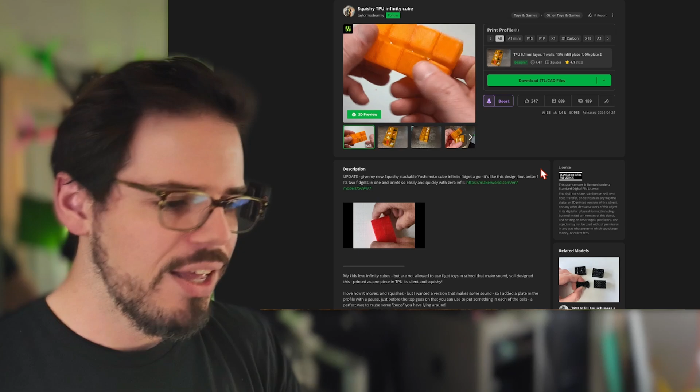We're going to design a squishy TPU infinity cube. It's going to have living hinges, and it's based on this design right here, made by Taylor Made Army on Maker World. So thank you for that inspiration.

So it's pretty cool, it uses living hinges. Instead of having to create hinges that move, like two parts that connect and interlock together, it's just one piece that bends. You can do that with TPU because it's a flexible material. I'm sure I have an idea in my head, but we're gonna figure it out as we go.

And you're probably familiar with infinity cubes. It's 8 cubes connected together in a certain way so that you can fold them and fold them and fold them to infinity and beyond.

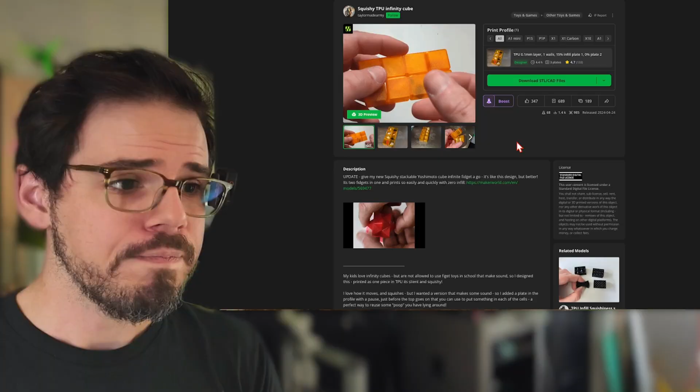Anyway, let's get started. All right, now we're in Bambu Studio, and I have this model from Taylor Made Army of this squishy TPU infinity cube. The main thing I want to use this for is to keep track of how this is built.

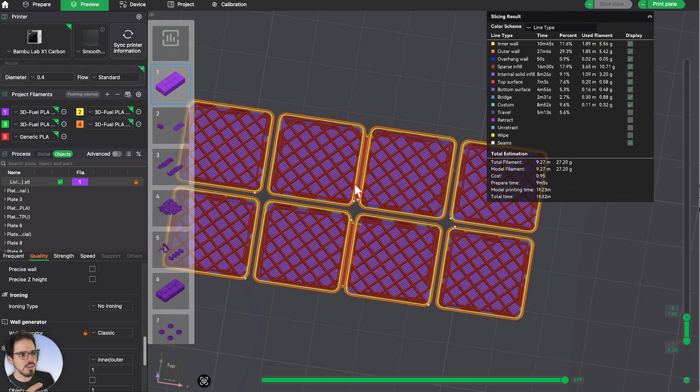You'll notice we have a hinge, and this could be done in different ways, but the main thing is you need to have a pair of blocks hinged in the same way.

In this case, we have the hinge here on the bottom, on these bottom blocks, and that's the first thing that prints. Then once the walls start coming up, we have pairs on either side, or from this view, the left and the right, with the hinge on that side. So hinge there, and then spin it around. Same on the other side. So symmetrical in that way.

And that's probably one of the best ways to print this. We could figure that out later, but that's just the thing to keep in mind. So this should be theoretically super simple.

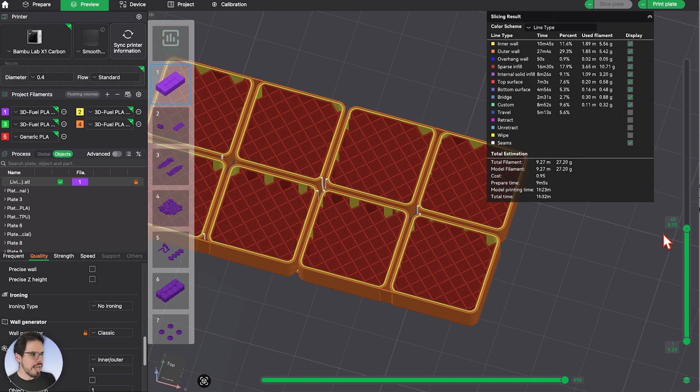One thing that I noticed with this one is the edges. I just wanted something that had chamfered edges. I thought that would be better. And then the living hinge, we'll figure that out. And maybe a little bit thicker.

I just broke mine, like just as I was beginning to start this video. I broke the hinge on it, but I've been rough on it. So it just broke apart. Now it falls all apart. So possibly a thicker hinge.

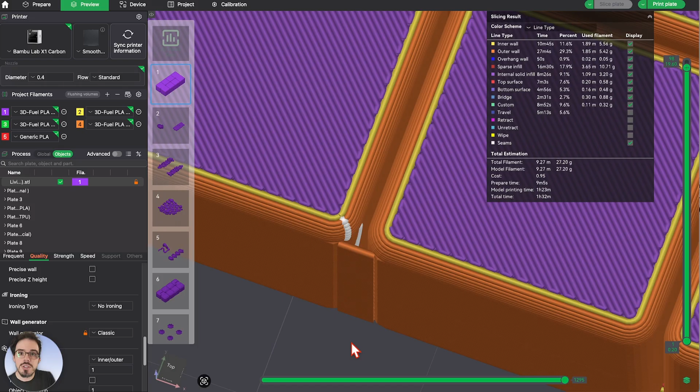But now that I'm looking at this, I think what I did wrong - I'll bet I did not do arachne. I should have followed the instructions and it didn't actually connect very well. The top view, you can really see it. Let's switch to arachne just to show you this. And boom, look at that.

It connects them. All right, now we're in Onshape. This is where we're going to design this. I have an idea of how to do this in my mind. I have not written anything down yet. So we'll see how this goes.

So what I'm thinking is we do a sketch, put it on the top plane, view normal to sketch plane. Then we get a center point rectangle, and we decide the size we want this to be. The original size is, let me just get my calipers here. We're looking at about a 20 millimeter cube, is what it was supposed to be. It's looking about 19 or something, so probably about 20 millimeters.

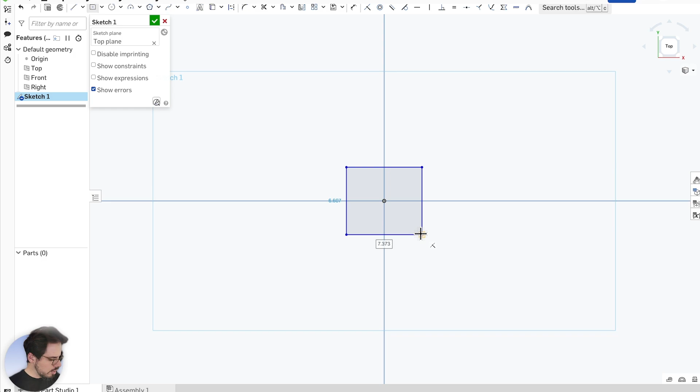I think that's probably a little bit big. Let's try - I've got the calipers here. I mean, probably 15 would be reasonable.

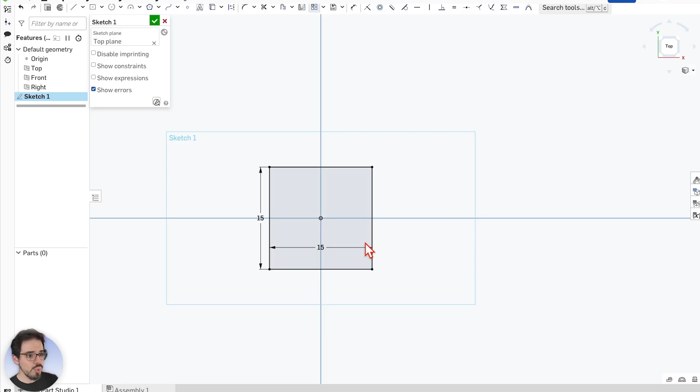Then what we're going to do is go up to the linear pattern tool, and we're going to select - yeah, there we go, select that for our linear pattern. We're going to do 4 in that direction, and 2 in that direction. And then we get to decide the spacing, basically. So the spacing, what should the spacing be? That's a good question.

Oh, I thought I did 4. There we go, I forgot to press enter. So...

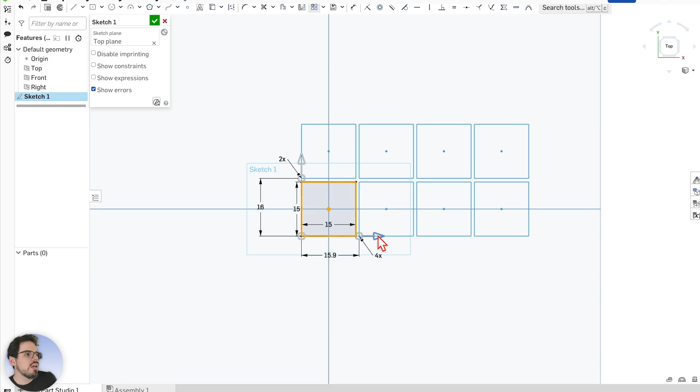The spacing should be even. I don't know, actually, let's make it 1 millimeter. That should be plenty, let's give it a try. So what that means is the offset, or whatever it's called here, is going to be 16 for both of them. Yeah, both of them, so 16, 16.

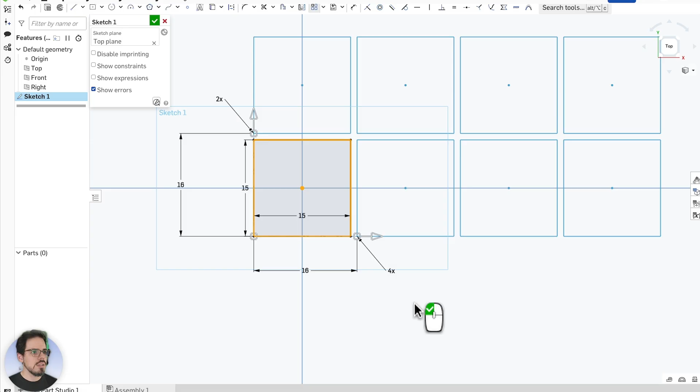So we have this nice, super simple grid. There we go. And then what we're going to do is connect them. But first, let's just take a look at, let's use the extrude function and just extrude all of these cubes. And they should be cubes, so we want them to be extruded by 15 millimeters.

Okay, nice, right? And then we basically just need to put walls on the connecting hinges. So I'm gonna try to not overcomplicate things. You know how I go sometimes. But we're gonna do it like this.

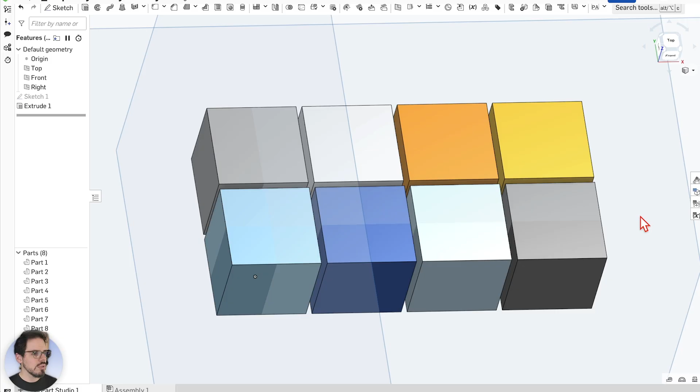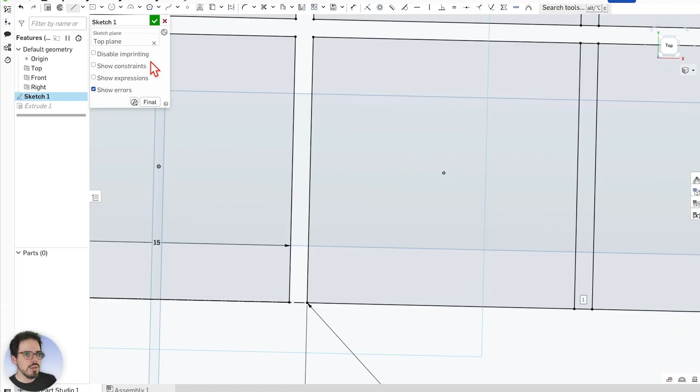So we have all these cubes, and then let me go back into the same sketch. Here we go. We're gonna just add lines connecting this gap on the two middle cubes, and then we'll go ahead and use a corner rectangle. These two, here and here, the two outer ones are going to be folding together.

I'm gonna make this like 0.6. The thickness of the hinge is really what we're talking about. Okie dokie, so we have these connected, those connected. Great.

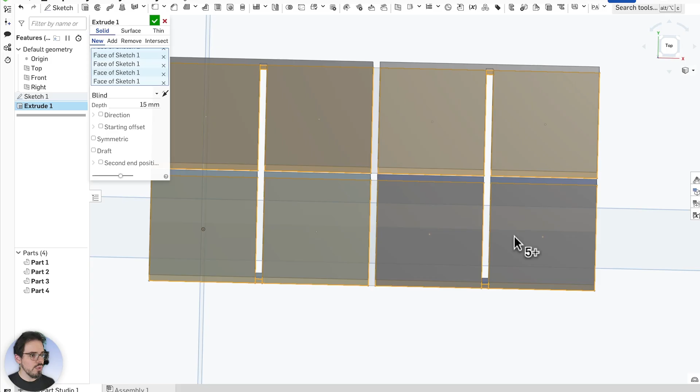Okay, and then actually, as far as the extrusions go, we can extrude the hinges on the sides at the same time with the blocks, at least for how we have it right now. So those blocks are hinged together, and then we need to do a new extrusion because we will not be going up the full length of the block.

So extrude, and then we're going to do our middle sections. Let's get that, come on, bring that sketch back. There we go. Our middle sections, both of them. There we go. And we're going to extrude, the height is going to be 0.6 millimeters.

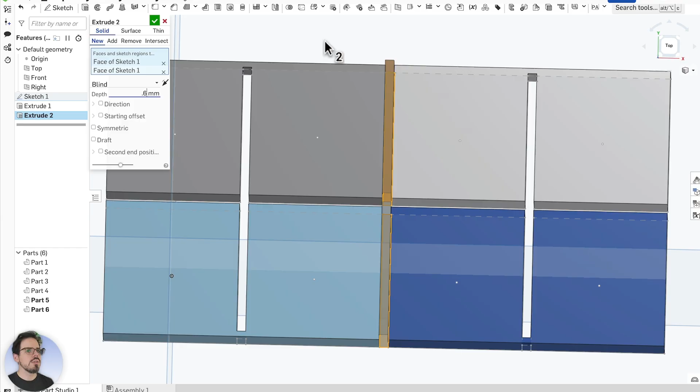Which that should work out. We'll try it, because I don't know, it kind of depends on the height. That's pretty darn thick, but that should be, I don't know, that looks really thick for how big the hinge is. Why do I feel like the thickness of that should be like half of what the gap is?

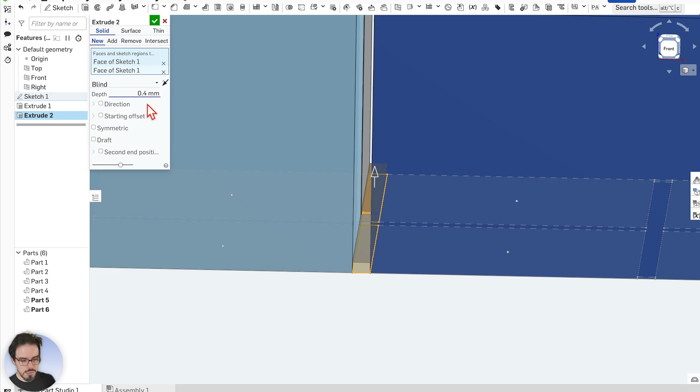I don't know, but basically the thicker this hinge is, the less easily it will move, and that could be a problem. So, just to test things out, why don't we make that one like 0.4, let's say. So that should be 1, or if we do 0.2 layer height, it'll be 2 lines, which is probably the same as the bottom thickness.

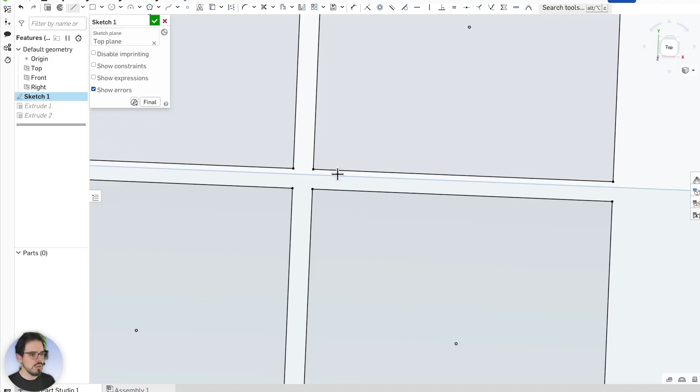We want to merge, just say merge with all. So we're going to merge those two together. Sketch 1, we only have one sketch. Do that to there, that to there. Connect those two like so.

Okay, and then when we extrude, we'll do a third extrude. We're going to extrude that and that. At this point, though, we have to extrude up to this face. Second end position.

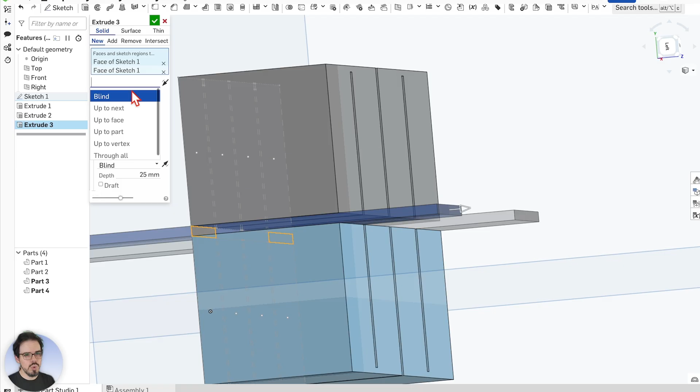Let's see, the first one is going to be up to face. Second one is going to be 0.6 millimeters from the opposite direction. 14.4. Let's click add. Oh, I did click both of those, so that's good.

Let's just say merge with all, because then it's just touching those ones. So that's the...

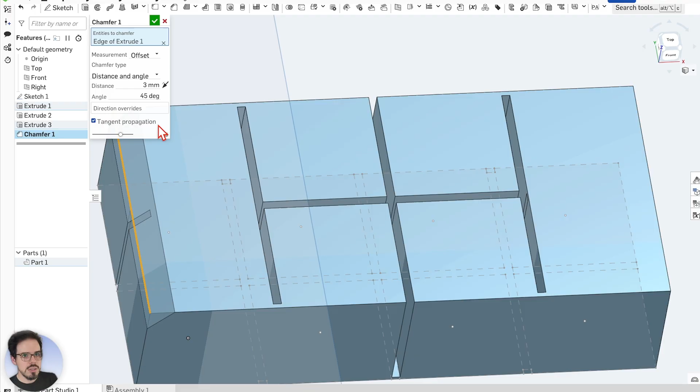Idea anyway. Let's go ahead and play with the chamfering. So with the chamfering, we're going to get the chamfering tool, and then we would pick a section. Let's say we want it to be like maybe 2 millimeters, something like that. So that's kind of the idea, is that we would do it on all the corners.

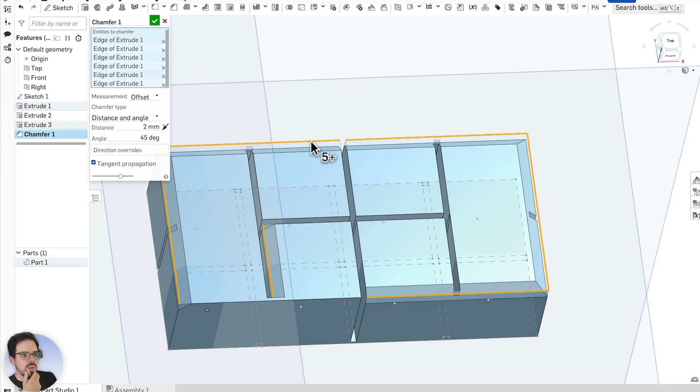Interesting, okay, so the chamfering is not working out for a lot of these for some reason. Then I think it's because of the cutouts, the way the cutouts are. Interesting, okay, so potentially it would just be chamfered on that outside.

So let's go ahead and just export this guy. Let's drop that guy in there. Wow, it's so much smaller. Holy smokes.

So let's slice the plate and just see what we've got. Looks pretty similar, all right.

Okay, all right, let's get away from classic. Let's go to Arachne. And there we go.

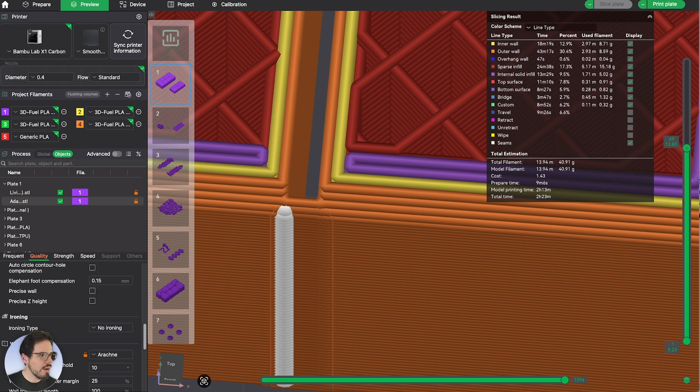There we have our walls, but as you can see, they're pretty small. And there's a seam right there. I don't want a seam right there. That is not a good spot for a seam at all. So let's just see if we can change where that seam is going to be.

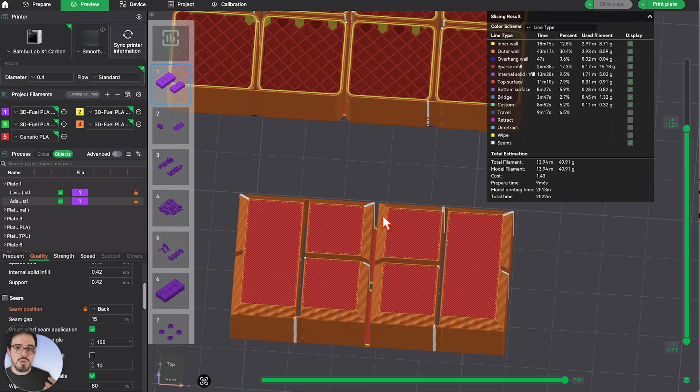If we set it to be at the back. Before I do any more designing, we're just going to load up the Bambu Lab A1 printer with some TPU filament and just give this baby a whirl.

Move that one off the build plate. We're just working with this guy right here.

The main goal for this is for it to be silent and not have that clacky clack sound of the PLA. But making it squishy could be pretty cool too, and that could be kind of a neat little feature there.

Now let's get it printing.

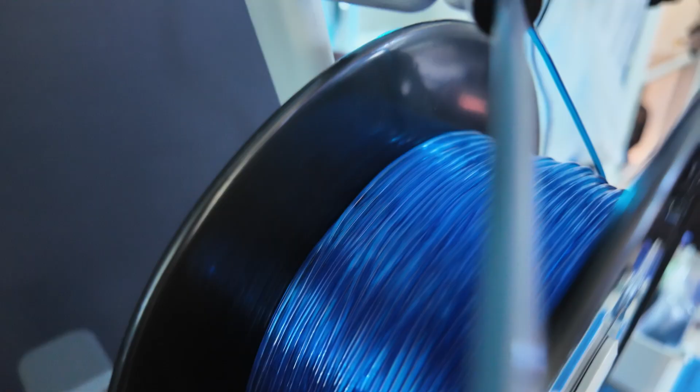All right, here it is. It printed out. Let's pull this out of here. I'll have to squeeze this off here.

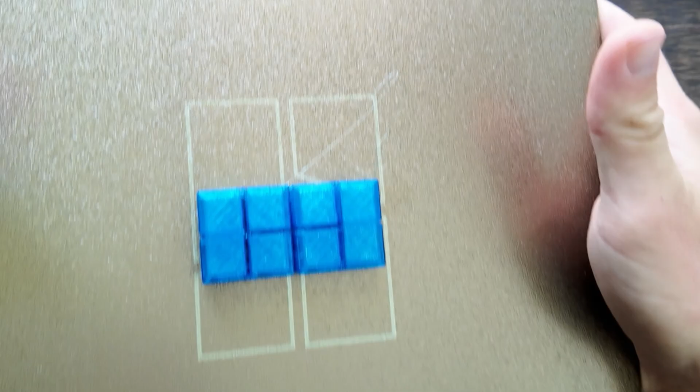Of course, we can't really pop it off the build plate, we're gonna have to kind of pry it off. I know you're not really supposed to use the textured build plate for this, but I've used it before with TPU and it's worked out okay, but this is very, very sticky.

Fortunately, it's a little bit of a smaller model, so we don't have as much surface area, but... All right, let's see what we have here. So, does it fold? Yeah, it does actually.

And, you know, there's a little bit of a gap right there, so it's not a perfect even amount, but that works. It folds this way.

And it should fold on the sides, so two sides fold in. Fold in here. That's going to be the sides. Right, so fold the top and then the side pieces, which are extra thick, really.

So there's a lot of resistance here, it wants to spring out, which some of that will go away as it gets worn in. And then very little resistance in this stage.

Fold it again, and then it wants to fold back in on itself, which is kind of cool.

This, by the way, is a clear blue SainSmart TPU. I think it's also 95A. It's very squishy, it's nice and squishy.

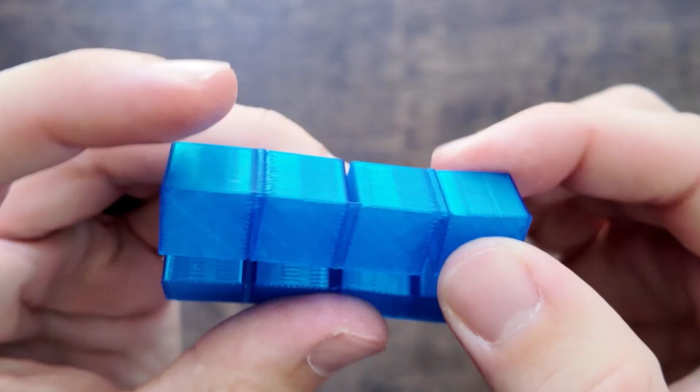Another option would be potentially doing like how I was saying, and adding a little curve to the hinge. However, is that very realistic? Probably not.

You know what would be really cool? Maybe it would be really cool is if you had magnets in here.

Now that we have a good reference point with this first printed version, we can go back into the editing program, change a few little things that we just talked about, and then print another one and see how it goes. Probably increase the size a little bit as well, I think that would be probably good.

Let's do it! So now we're back in Onshape. We're going to make some design changes to our first version here.

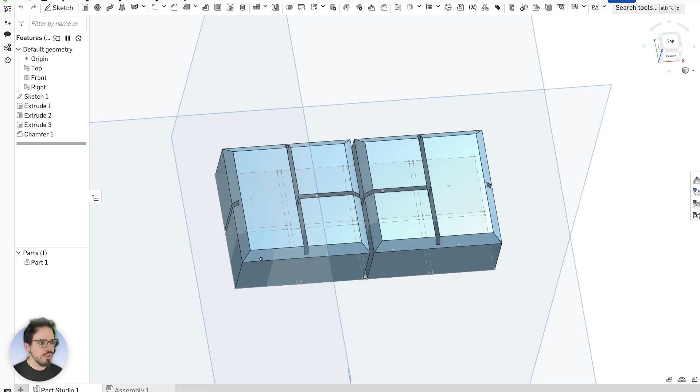What does that look like? 17 millimeters, and then 17.5.

17.5 is the spacing, so that we have 0.5 between them. So there we go, a little bit bigger. So we have the sizing.

What I want to do here is try on this original sketch putting in a fillet. We want to do a fillet here because it's going to give us a nice rounded edge, since we're going to be taking it up vertically. Generally on the vertical pieces you can do a fillet, while on the horizontal pieces you want to do a chamfer.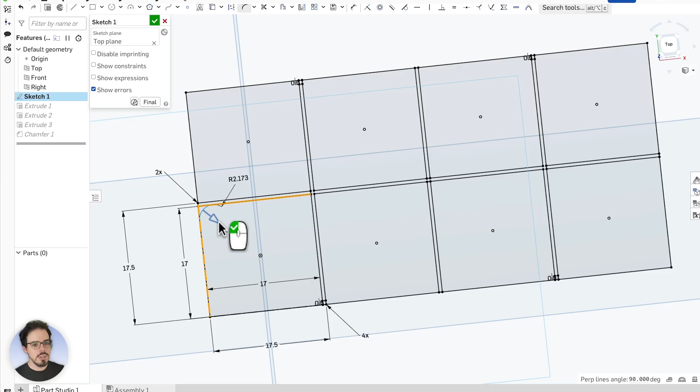Let's do 2 millimeters. Okay, this one and that one. Enter, enter. Great, so that's what that looks like. Looks like a nice cube.

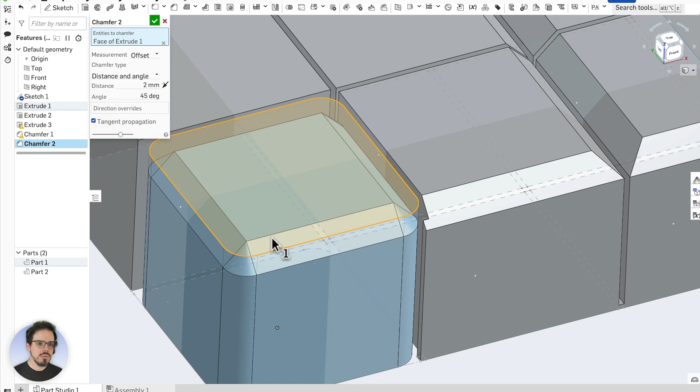Now the question is, can we add a chamfer to the top of it? And how do we do that? Oh, yeah, and I think that's a pretty nice chamfer, so it should be nice and smooth. It is. Also, we want to chamfer the bottom, just like that. We also want to chamfer here because then we have this 45-degree angle, and we'll be able to stack the layers up just fine, especially considering we're working with TPU.

We basically are. Delete sketch entity. Yeah, and then it's basically just making all of that like that, so we're basically starting from scratch.

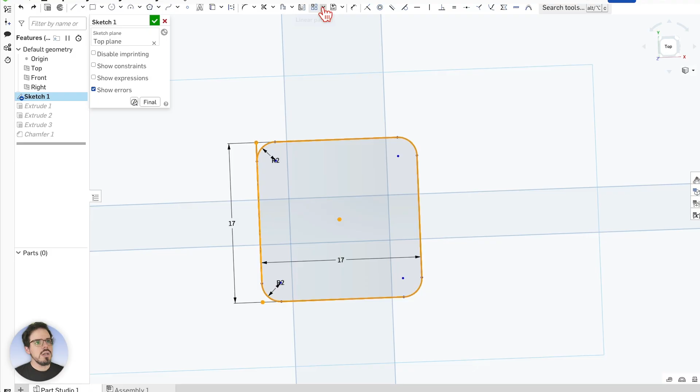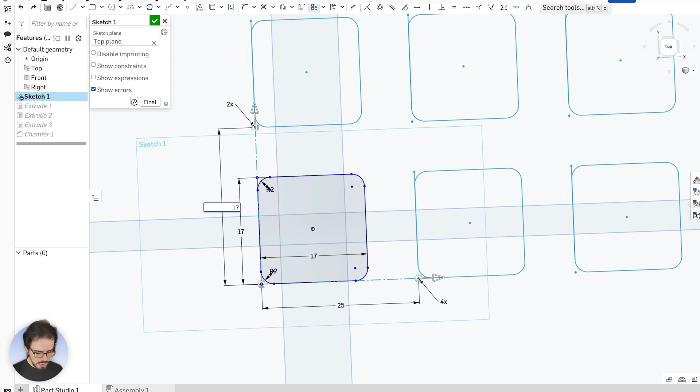Now we can take this and take the shape, and in some ways this is extra work, but the idea is we are doing this once, making the shape once, and then we can just copy whatever we need to. So this is going to be 4 in that direction, 2 in that direction. The distance is going to be 17.5 millimeters and 17.5 millimeters.

And now we are back to our nice rounded cubes. So what I want to do is get a center point rectangle, and I want to find the center of this line, and then the center between that. Do a corner rectangle using one of these radius points and just do it like that.

Let's do a line, midpoint line. What if we took it all the way from here and all the way from here? So 0.4. There we go. That's what we want, okay.

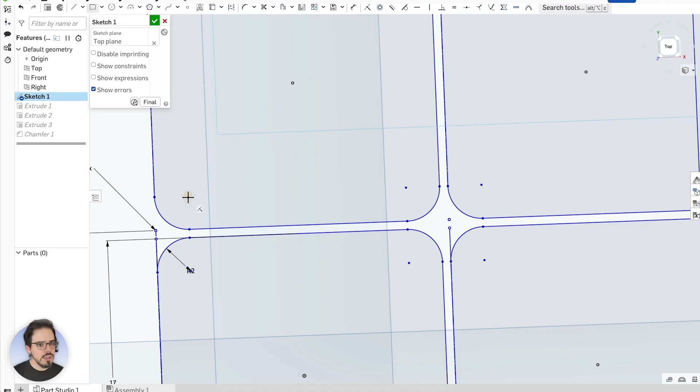We're going to do the same deal of attaching these two as well. So from that point to that point, and that point to that point. Extrusion. Extrude, so we want to extrude.

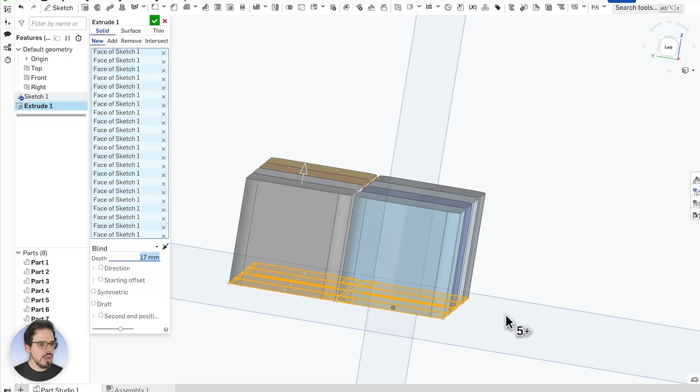So I guess this is the downside - I should have maybe done a different sketch for the other bits there, because then I'm going to have to click on a bunch of stuff. All right, at this point it looks like we have our nice cubes here with the rounded sides. We're going to click OK.

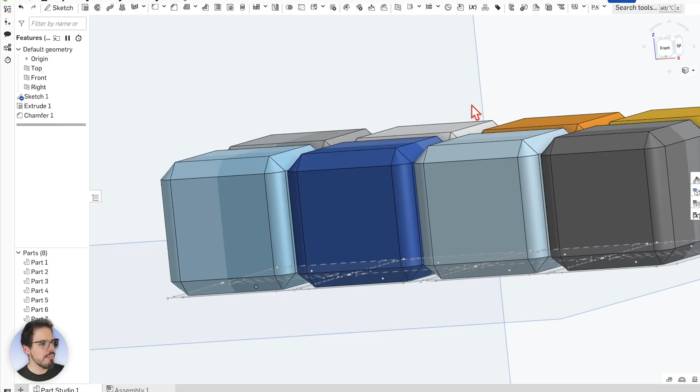Next we want to do the chamfering. You get a chamfer, you get a chamfer, you get a chamfer, you all get a chamfer. Look under your seats - what is it? It's a chamfer. Let's click OK. And that looks pretty smoking right there. Look at that thing. Wow, wow, wow, wow, wow.

So what are we going to do next? We changed the sizes, we changed the blah blah blah. Basically, well, we just need to connect the extrusion parts. I should have clicked on that in the first place, but that's okay.

0.4 millimeters. Okay, we want to merge. We want to add them with parts 3, 4, 5, 6. Great, so that looks really nice. So there you go. All right, cool.

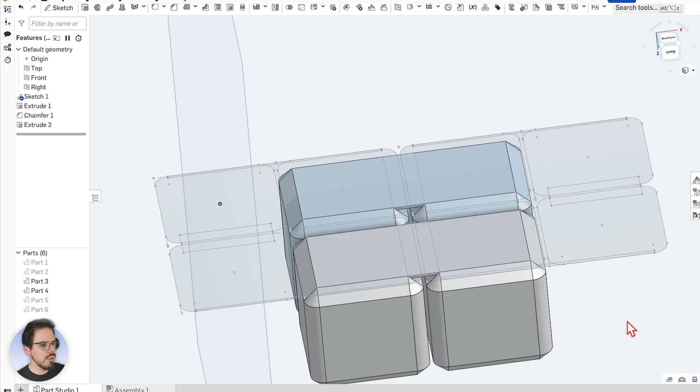So that should be nice and smooth, should print well. And then we're going to extrude, let's go ahead and extrude the walls now. So left side, second endpoint.

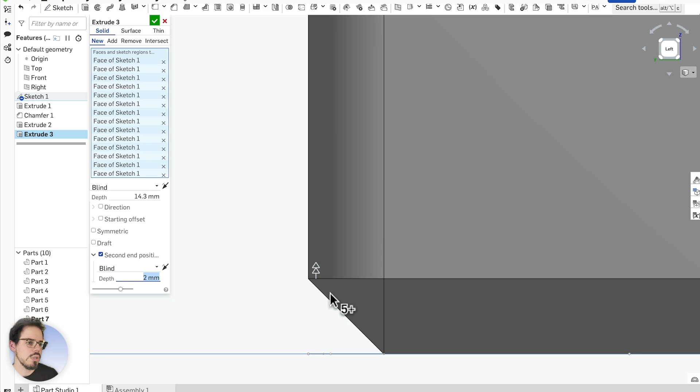I'm not totally sure how that's over there. So basically, if we say we want it to be like right there, which is 2 millimeters, by the way, that is the same as the chamfer that we put on there. Add - we want add, so merge scope, merge with all.

There we go, we have this nice face. It's going to connect right there. That should be just super great. 0.5 millimeter between here - I think that's reasonable, especially for the printing tolerances. We're going to want a little bit of tolerance, but we can change that if we want.

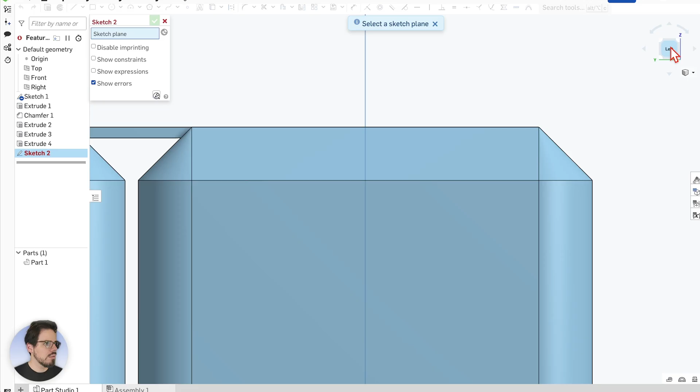Hear me out, hear me out - maybe we take 2 corners and do like a little ball divot. Because, you know, I can't just leave well enough alone. That would be crazy. Absolutely amazing. So let's do a sketch on this plane, on the left plane.

Or the right plane, I guess it's whichever one. We're going to do a line, take it from this midpoint. We'll use this and this, and take a line to find this center point and just bring it on down to here. That'll be our reference point.

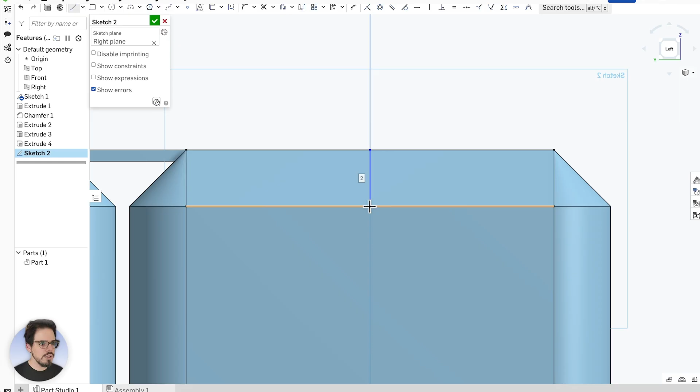We're going to do a 3-point arc. We'll take it from... I don't want to go quite to there, but let's just say if we took it from there and did it like... is it going to be...

Alright, scratch that, we'll just get a midpoint line. That way we know it's symmetrical. And let's just take it out to, I would guess, about... oh, that's right, 12. That's what we wanted to do, right? We wanted to take it out to 12.

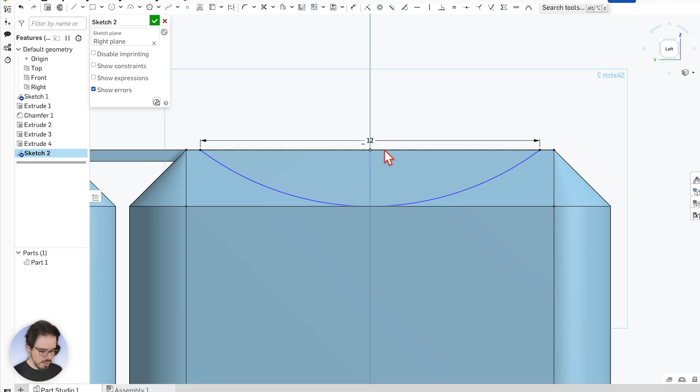Okay cool, the difference here is that we are on the side of the object, so we're looking at a side view. Let's change that to Q so it's actually a thing. And then we have this half chunk right here. Let me delete that and put in another line from here to here. Oh, we need to make that an actual line, so then we actually have a chunk. We will once we get rid of this.

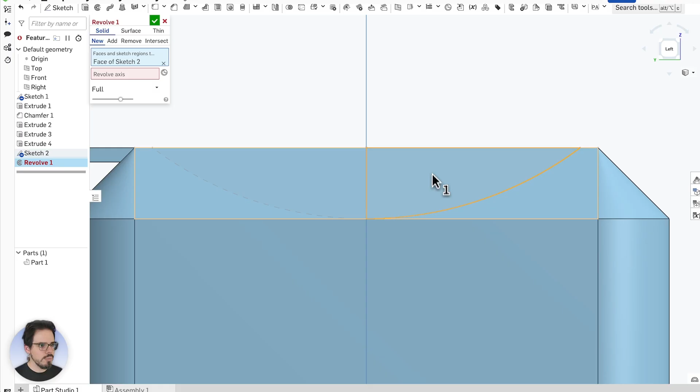Okay cool, now what we can do is click OK, and then we can revolve. We're going to revolve half of this to basically form this bowl. The axis is going to be, we'll select axis, that's the axis, and then we're going to say remove. And that's what we're going to end up with.

So let's go to sketch 2. Let's go to the left side, and then let's use this line and this line and this line, pretty much all the lines really just about. And what we're going to do is get a line and find the midpoint of this line from here to there. There you are. And just take that right across.

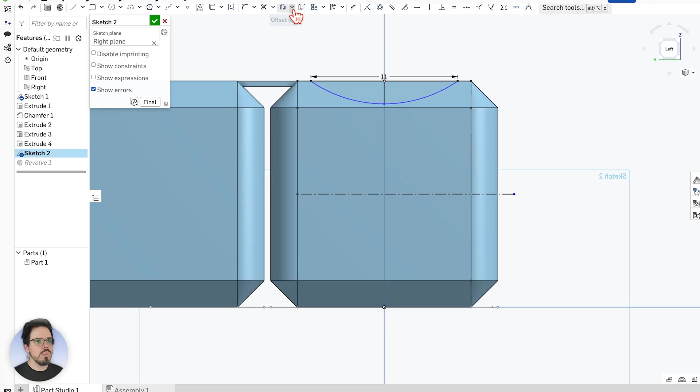We really don't even need to connect it to anything, it's actually just going to be a reference line because we're going to mirror this, I think probably the best way to do it. So we're going to say mirror, select the line. You always got to select the line first, which I think is the opposite of Fusion 360.

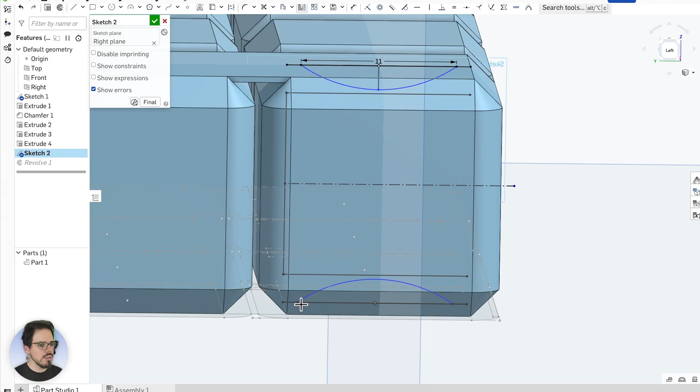And then that's the line we want. Is it? Yeah, sure it is. Those should be connected, those dots should be connected. And let's do that too. Great, and so we're like, okay cool.

And then we go to revolve, and we're going to revolve this sketch as well. So we need to hide this, hide that, we're going to revolve that and merge with all. Let's show that part so we can see it.

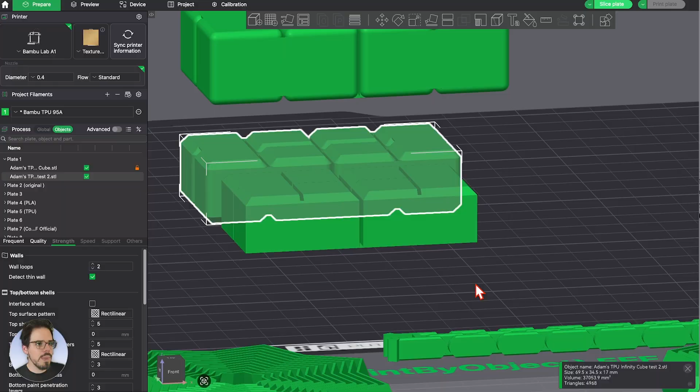Boom, Bambu Studio. Now we're in Bambu Studio, and we're going to take the test 2 version that I just did and put that in there. Okay, alright cool, you can see it's a little bit bigger, it looks much smoother. I think it's probably just about the perfect size. It's much smaller than the original, or the other person's version here that the other designer made. It's much smaller, but still bigger than what I had. So I think that's cool, I think that's going to be really great.

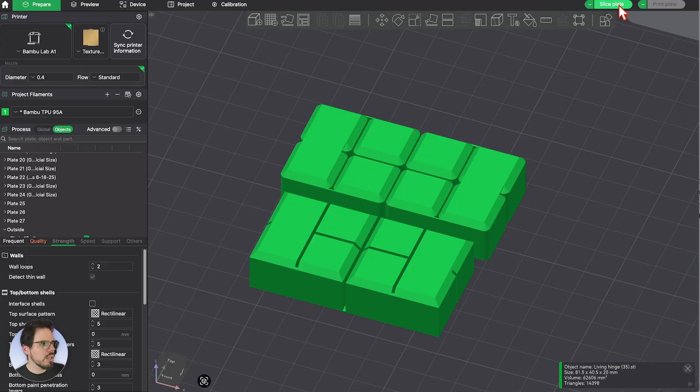Let's go ahead and slice it, and we'll slice both of them side by side just so we can see the differences here. Okay, alright, looking good. Yeah, well actually not looking good because we need to change the settings on the new one. Alright, I'm going to toss this on there and then we're going to print it and see how it is when it turns out. So let's start printing.

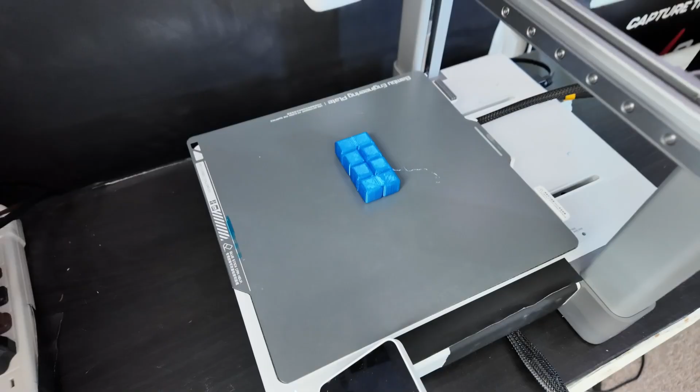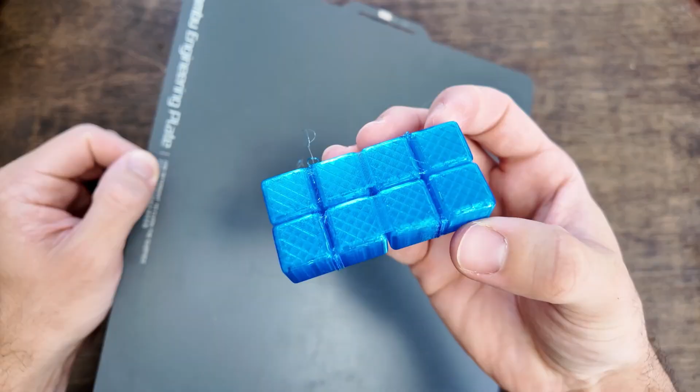Alrighty, here we go, it is printed. Let's pull up this build plate. Maybe this one will be a little easier to take off. Alright, version 2, let's see how she turned out. Let's see how much this sticks. Oh yeah, oh that's such an easier release. That's crazy. Alright, so this one didn't turn out as clean.

We have some stringing and whatnot. Oh wow, very thin, very floppy, I kind of like that potentially. And then very easy to turn right there because the hinge part is so much wider, so you see we actually have a lot more play, which could be bad, but let's see here. So we do that and then we fold. So folding these guys, you can see we have quite a lot of stringing.

Oh wait, so this is the bottom, this is the top. So between these guys, we have a lot of stringing. It could just be that the seam is in a bad spot and we're getting stringing here.

We could adjust some settings as well, or it could be that perhaps they were put too close together. It's hard to tell where the actual hinge is and where it's not, but it's going to be on these guys.

There we go, so you see right here we have a lot of stringing going on. There's almost a second hinge because there's so much stringing.

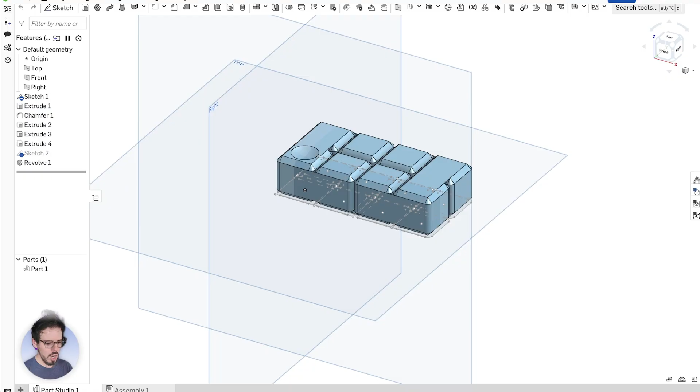Let's get right back into it here. Let's jump into Onshape. So what we're gonna actually have to do in order to get rid of these fillets, let's just go to sketch 1. Lack of a better, more elegant solution, I'm just going to delete them on these parts. So extend, and then we're gonna press X, and then extend that line.

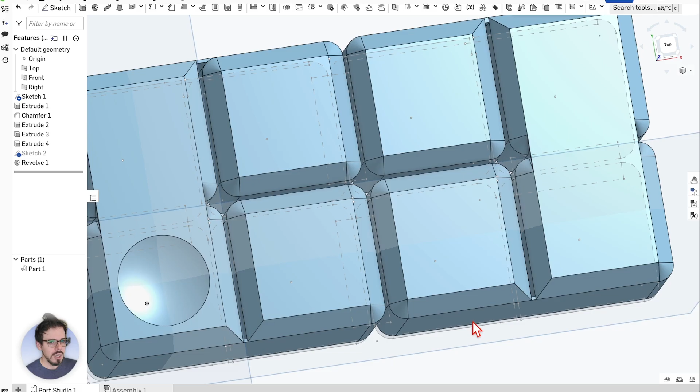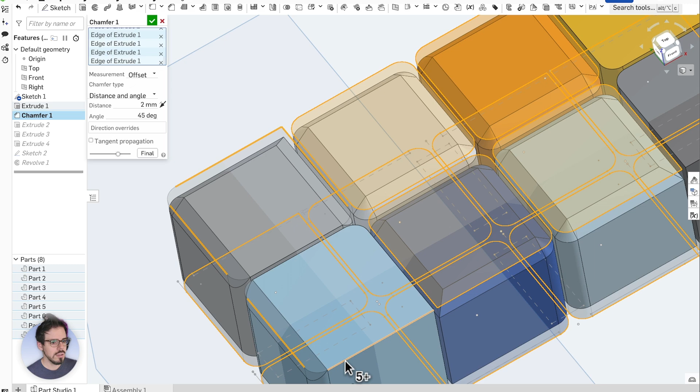There we go, next we want to go to the chamfer. Let's just unchamfer all of the top ones. Tangent propagation, at least for this one, yeah, so turn off tangent propagation, and then we just want those sides right there, and there, and there.

Awesome, so now this is the bottom view, and you can see it's connected like that, but the other ones are chamfered and kind of the same on the top.

Actually, increase the size of the hinges. So you can see here this rectangle that we made last time is 0.4, we're going to change that to 0.6. Hopefully nothing crazy happens. And then what's going to determine these other ones is going to be the extrusion.

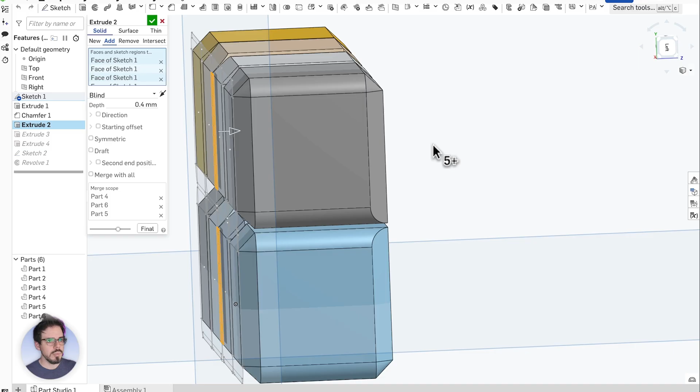So we could do these ones. So this is our bottom extrusion, and that's basically going up 0.4, and we want that to be 0.6.

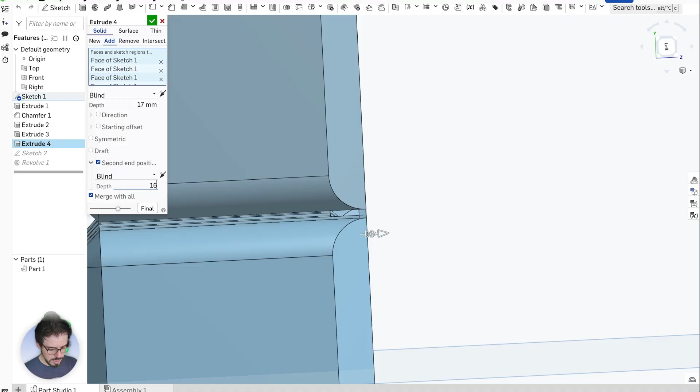Let's say 0.6. So the thickness would be 0.4, so it'd be kind of like 2 layers, but one is a bridging layer and the other is the actual layer. So we're going to again change this to 16.4. We're on another side quest in case you didn't notice.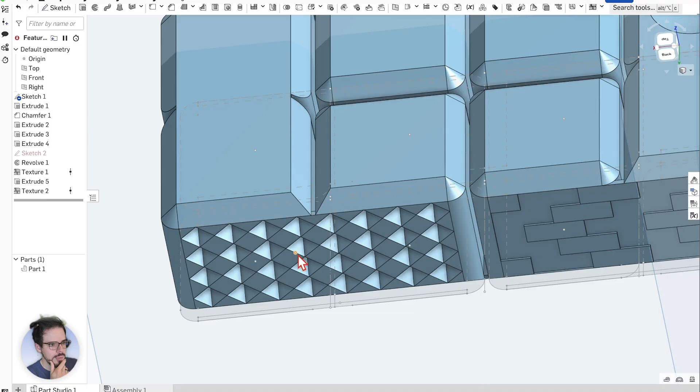What other patterns can we do? Oh, pyramids. 5 rows? I see. So that's going to change that amount, so we get like this waffle pattern.

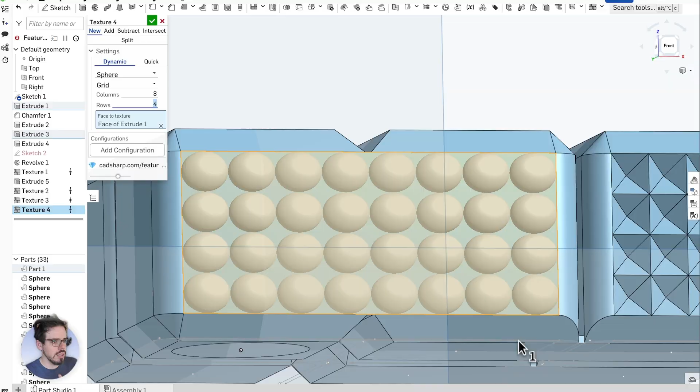We have spheres. Ooh, actually, that could feel really cool if we just made it really bubbly, you know? That looks like a really cool texture. Oh, yeah, that's a great texture.

I'm going to do that same sphere texture to this face right here. So, fascinating stuff. And we're going to do texture on the opposite side.

Oh, staggered. We're going to subtract them. These shapes should go into those shapes. What fun! So now we have all the textures to test out.

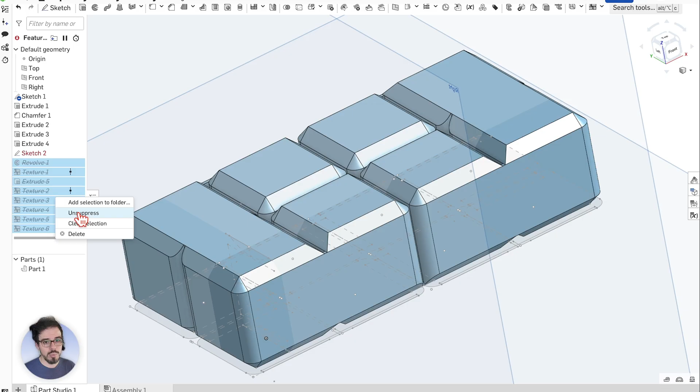Suppress, and then Shazam, they're all gone away. This part, I'm going to export. We can get back in here and select all of these, unsuppress. We probably could have just hit undo as well, but unsuppress those, and then it's going to bring everything back. So now we have all these really cool textures to test out and play with.

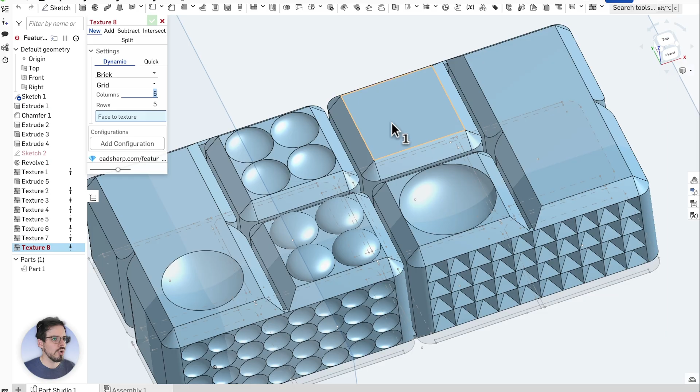There's one more texture I want to try out. Just one big bubble. We're going to subtract it, blah, blah, blah. Okay, great. And then we're going to do the same one over on the opposite side. And shabam. Okay, this is going to be very interesting. Alrighty, now we're ready to export this one.

So now we're going to jump into Bambu Studio. Alright, let's do some slicing. They're all stacked on top of each other, so let's take a look. Get ready to nerd out on some nerdy slicing stuff. Alright, let's slice this mamma jamma. Let's go to line type.

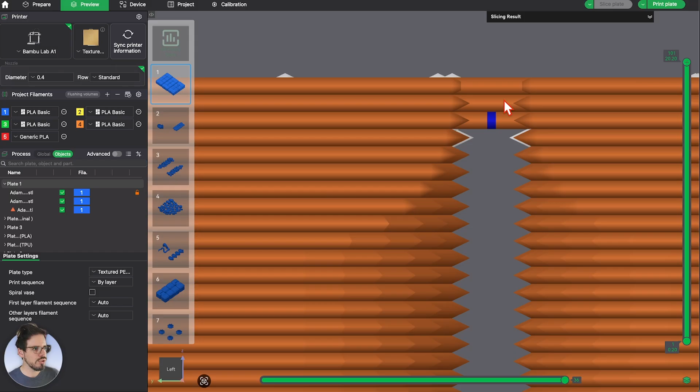You see the bridging here. If we look at a side view, the bridging there. This one has a very small bridge, 3 lines. This one has a very large bridge, 2 lines, and that is a bridge right there. So one of those 2 lines is a bridge—I guess I should have said gap—and then look how large the bridging is right there. So, night and day difference.

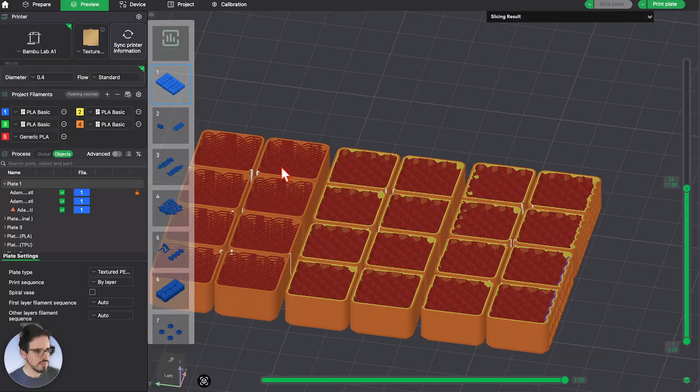Let's drag this slicer down. Is there an easy way to copy and paste the settings of one model to another? Because I don't know how to do that at this point in time, and I will probably figure it out once I make this video.

So you can see on the one with the textures, we have a lot more going on as it's forming those walls. And interestingly enough, because of the textures and the way it's adding horizontal and vertical stiffness to the walls, it's not going to be nearly as squishy as it was.

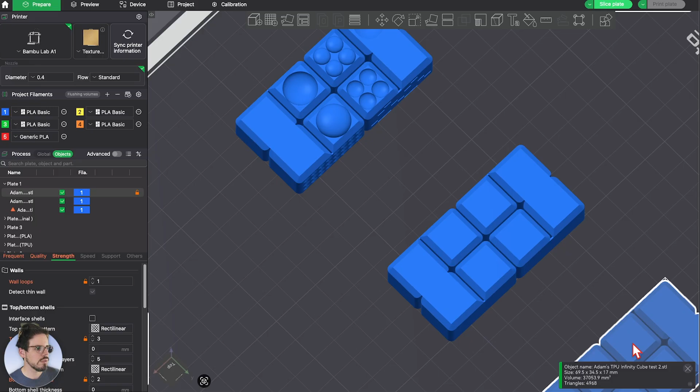And then, of course, the infill is giving us vertical stiffness also. Move everything apart. One wall, because that is pretty much how I want these to be printed for efficiency and whatnot. Outer wall 0.6. We'll probably even go larger, but that's what we got for now. So the seam position, let's say back, and I'm curious if we do this.

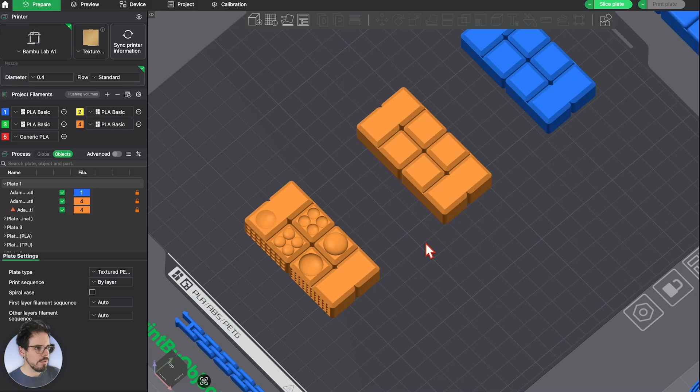So what if we, let's change this to like, let's rotate these. What happens if we rotate them? So back meaning the back of the build plate. And let's see where that seam shows up as we go. Oh, hey, that's a lot cleaner.

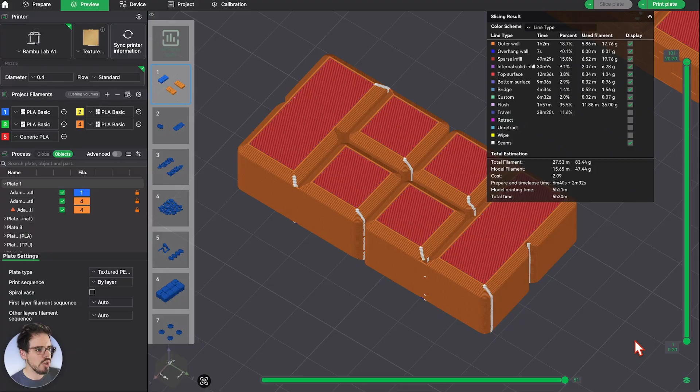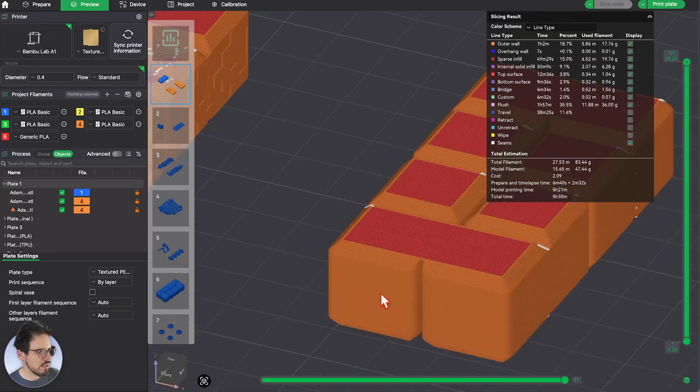That looks much cleaner, actually. So as we go, let's look at our finished thing. The white lines represent the seams, showing where the seams are in the print. Notice we don't have a whole bunch of seams on these hinges, but on this one we have a ton - that's where all the seams went. That could be because that's the back of that one, and there may not be a way around that. Let's rotate it about 45 degrees. So that could be good or it could be bad.

All right, we got it sliced. Let's toss some TPU on our printer and print it out, and then we'll come back and see how it turned out.

I'm getting off on a tangent. Okay, we'll be right back.

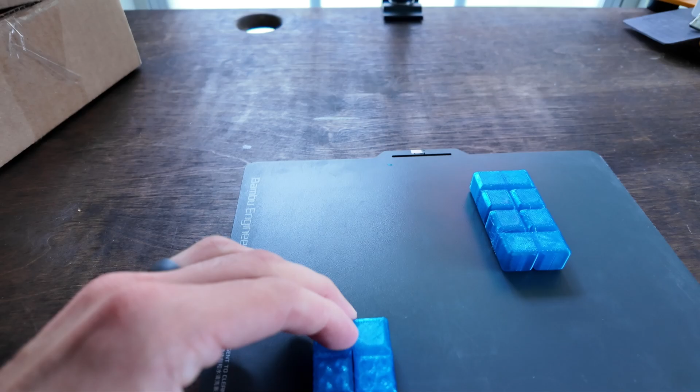Alright, here we go. We've got the two different versions off the printer. Let's set it down on the table and see what we've got. Oh yeah, they come off so easily off of this build plate that's actually intended for that. Imagine that. All right, cool, let's see what we've got.

Ooh, I like the texture here. With this TPU, the very small details are not super noticeable. I can feel the little square shapes on this pyramid texture one that we did, and I can feel more of the rounded shapes, a little smoother on there. On the side we have the brick, which I actually like quite a bit - it's a really nice texture, kind of neat, gives it a little pattern instead of just boring walls. And then we have our diamond texture.

Oh, I don't know, I might like that the most. I tell you what, I'm really enjoying how squishy this is with this TPU. It's just really fun to squish. Whoa! Alright, so this big bubble right here, that's fun. That is a fun one.

That's going to be really cool. The question is, will it actually work? These little bubbles here, they're kind of hard - it's almost like they're shaped to fit Legos, which I could see doing. But yeah, they're not very nice, honestly, and also the negative shapes there, not very smooth. I actually prefer this kind of deeper one right here, on the opposite side of this bubble. But on this one that we actually designed, it does not feel very good.

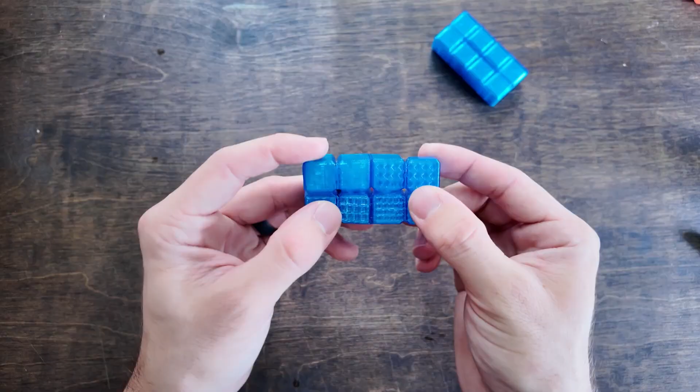And really, even on a PLA one I think would work really well too. That'd be pretty cool. So that actually is. I mean, we're kind of there. All right, let's take a look at this one.

This is the non-textured version. We have quite a bit of defects right here, some blemishes. It doesn't look super great. This one I did line infill and not very much of it, so it is very squishy. You can see all the line pattern compared to this is rectilinear, and then this is line. The line is kind of sporadic and just crisscrossed and stuff. But let's give this a try.

Okay, we have a lot of stringing, and I've been dehydrating this filament, so I don't think that's the issue. But then again, this is very old filament. Like, really, now that I think about it, this filament is actually - how old is this? I don't know, 5 years old, maybe not quite 5 years, but it's been around a bit. Maybe I should try this with some different filament that I got, some newer stuff.

Yeah, so it's being kind of weird here. We're getting a lot of resistance, like a lot of resistance. Let's do a little slice, those little threads. Okay.